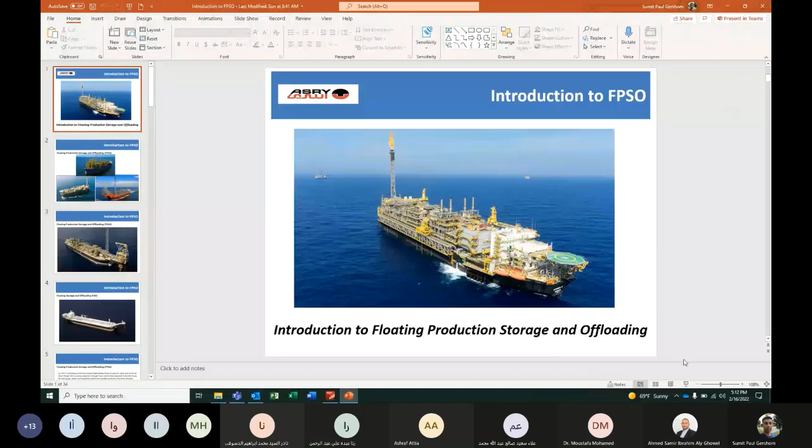Yes, it's visible. It's visible. Okay, fine.

So today's topic is one of the very interesting topics, which I cannot say is exactly related to marine. It is partly marine and partly offshore. I'm not sure how much you guys know about FPSO. It is one of a very unique kind of vessel.

So what is FPSO? FPSO is a floating production, storage, and offloading vessel. This is not a regular seagoing vessel. These FPSOs don't do charter or trips from port to port, or cargo loading and offloading. They are stationed in one location offshore for years, sometimes even for a straight 20 years. They don't go for docking every 2 or 5 years. They stay in one offshore field for 10, 15, or sometimes even 20 years.

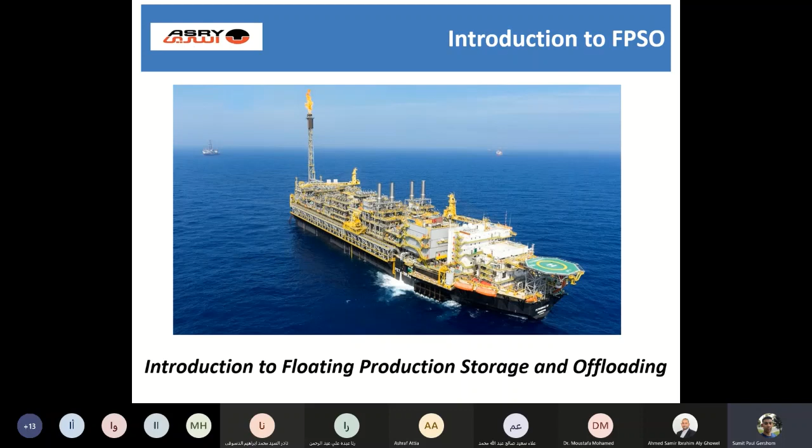We usually define FPSOs by the type of mooring system and the type of processing platforms on top. FPSO stands for floating, production, storage and offloading. Floating means it's already a vessel, we know it floats. The second item is production - on top you have a lot of production modules or different kinds of production packages. Then storage - the cargo tanks, which are below the hull, below the main deck. And offloading is when the treatment or basic processing is done, it is offloaded to another vessel, which transfers this processed or semi-processed crude to a refinery.

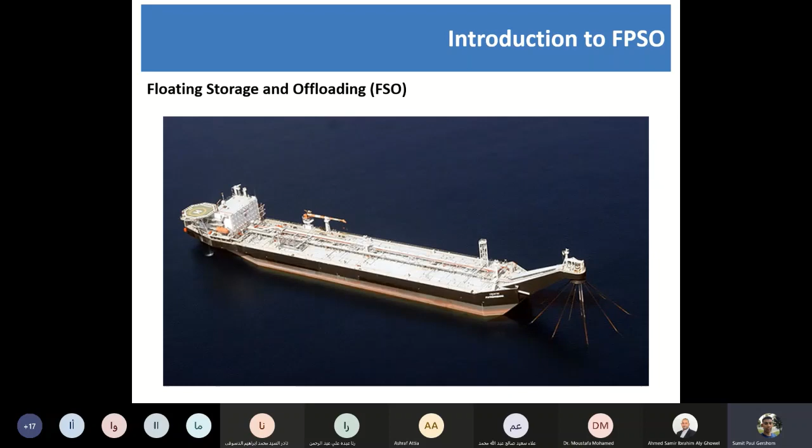So what is an FPSO? An FPSO is a floating production system that receives fluid - a mixture of crude oil, water, and other chemicals or gases, or produced water from the well, from a subsea reservoir through the risers, which then separates the fluid into crude oil, natural gas, water, and impurities within the topside production facilities on board. The modules on board the vessel do all this operation - they separate the crude, separate the natural gas, and remove water and other impurities. Then this crude is stored in the storage tanks of the FPSO and is offloaded to a shuttle tanker.

Most FPSOs and FSOs are ship-shaped and can be secured to a seabed via a variety of mooring systems, the choice of which is determined by the specific environment. As I was saying, these are two very important deciding factors for an FPSO: one is the mooring system and one is the process platforms - what kind of process platforms are present on the deck. Some of the FPSOs can stay in one location for 20 years or longer.

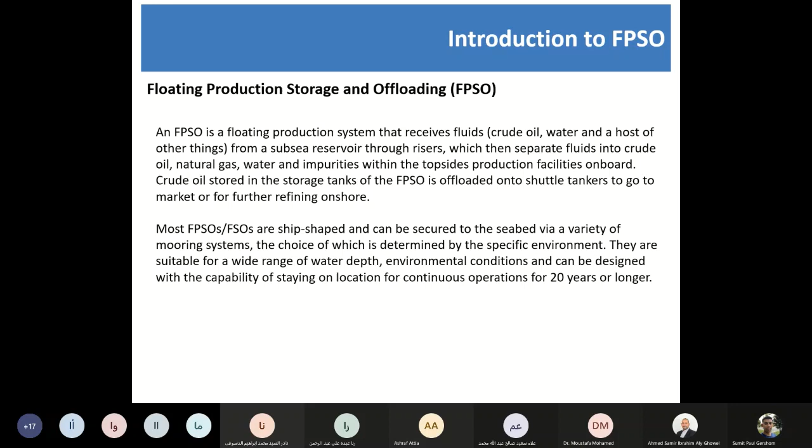Sumit, my screen is not moving. Is it only me or anybody else? For me, it's only for you. Same? It's clear okay for us. Okay Sumit, so sorry, proceed okay. Okay, my network, okay.

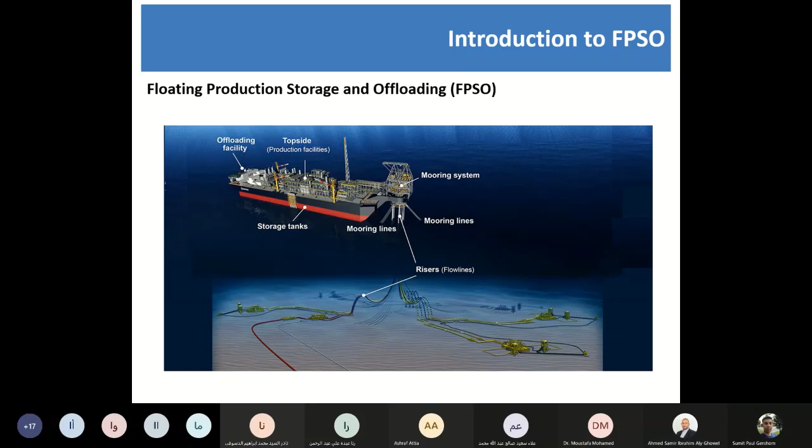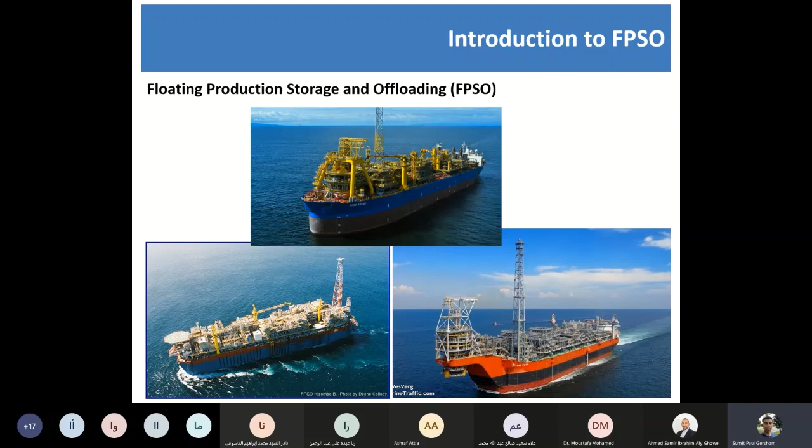So the three different kinds of FPSOs that we have, as I said, are internal turret, external turret, and spread mooring. This is what an internal turret looks like. When I say turret, this entire structure is called a turret - or even in this left bottom picture, this entire structure which looks opaque is a turret. So what is a turret? I believe you guys will know what a DP system is, dynamic positioning.

You must have heard DP0, DP1, DP2, DP3 - those kind of vessels. So this turret does exactly the same job as a DP, but in a much simpler way. Here in this kind of vessel, there is no DP at all. So how does a vessel stay in position? This acts as a very simple mechanical bearing, and this turret is moored to the seabed, and it allows the vessel to go around the turret.

There are some parts which I will show. There is a main bearing at the top, and a lower bearing at the bottom. And there are chains connected to the seabed, and then the risers - these are the risers coming from the seabed which bring in the oil.

So the internal turret is integrated into the bow end of the vessel and is supported on a large bearing arrangement inside the moon pool. As I was saying, there is a main bearing, and this cutout section is called a moon pool.

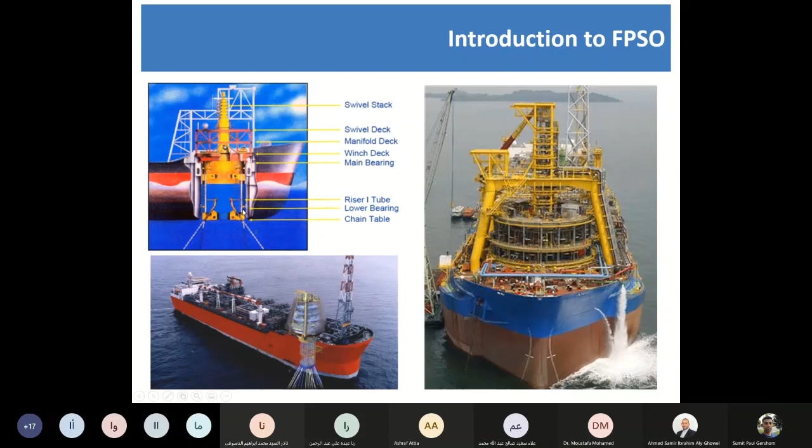The internal turrets are able to support a large number of risers from the seabed. These kind of turrets are only installed when there is comparatively a large number of risers coming from the seabed to the vessel. Also, the second important criteria is that internal turret can be used in deep waters and mostly for severe environments where you have waves up to 18 meters. So internal turret is mostly used where it is harsh environment and when the number of risers is much higher.

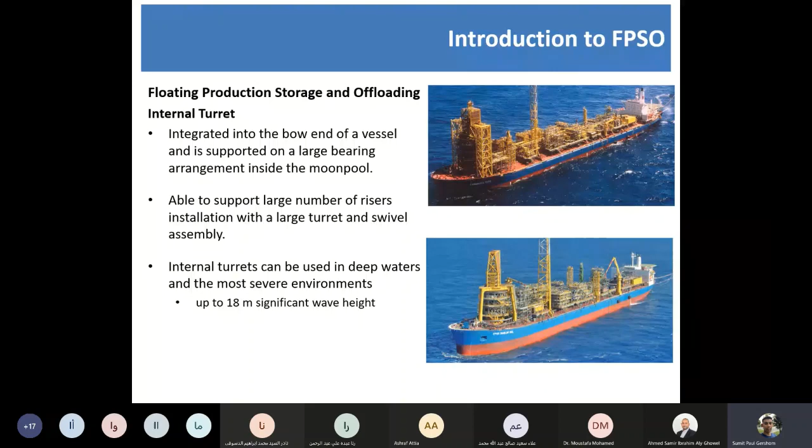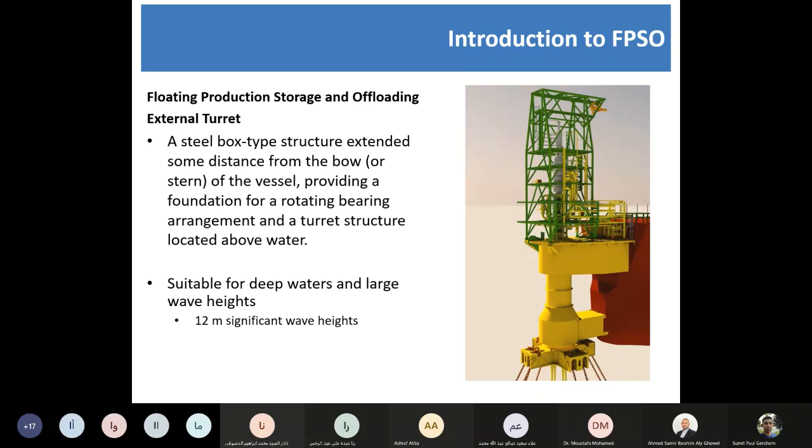So this is also the external turret mooring, you can see in the picture here. There are chains which are connected to the seabed - this is the mooring - and then there are the risers in orange. These are the production risers coming to the vessel.

So when I keep saying turret - what is a turret? A turret on a vessel is moored to the seabed and at the same time allows rotational movement of the vessel, which we call weather vaning, through the integrated rotating part in the hull. This allows the vessel to move around it no matter what - whether it is the wind, the waves, or the current. So the vessel stays in the same position, it just moves around this turret.

And this is a swivel stack. This is a very important part on the turret. This is an entire turret, and the top section of this turret is a swivel stack. What is the role of a swivel stack? This picture will show a display of a swivel stack.

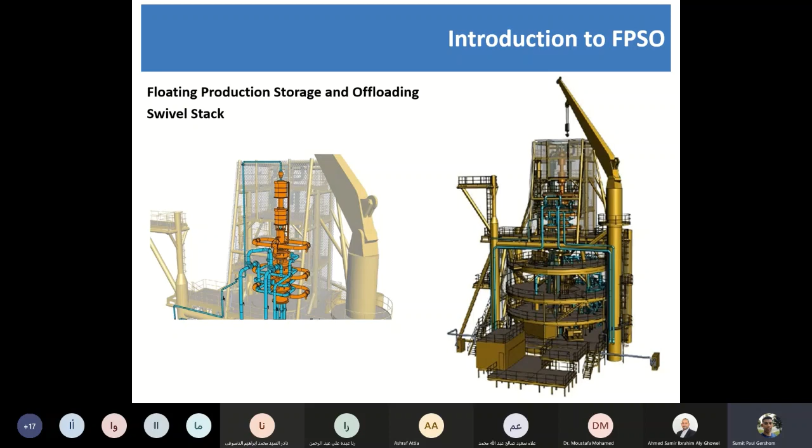So whatever oil or gas is coming from the risers, when the vessel is moving or rotating around the turret, this swivel stack makes sure that the risers don't get entangled or messy. The reason for that is it works very similar to hydraulics on a crane or a JCB, where a crane can do a slewing operation in 360 degrees without stopping, because the oil keeps on passing from the pipes to the necessary equipment or winches. It works with almost the same principle - it receives oil or gas from the subsea and passes it to the topside modules without interrupting. So the vessel doesn't have to come back to its location, and the risers don't get entangled.

Mr. Sumit, can I ask a question? Sure.

When we use the turret, is there any anchor at the end of the chain or what? Yes sir, there is an anchor, but that anchor system is also a very vast topic - there are a number of different types of anchors. Some are even pile type anchors, or some are suction anchors. This is not a regular drag anchor, mostly for internal turrets and external turrets. Clients or big companies like Shell, BP, or ExxonMobil working on these kinds of vessels mostly go for suction anchors. Suction anchor is a very simple concept - it's a big tubular which is erected on the subsea, and then the water is pumped out from the tubular, so it self-penetrates into the seabed.

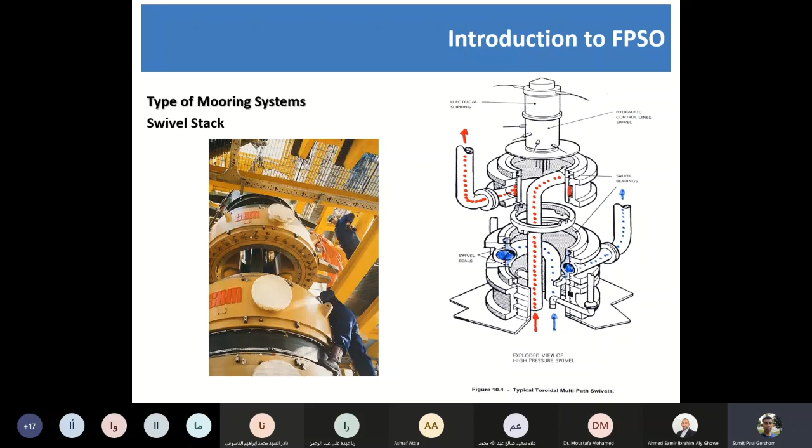So this is how a swivel stack looks like. A swivel stack is a toroidal swivel system installed on top of the turret that allows continuous transfer of fluids from the well to the platform, that is export, with uninterrupted power and control also. So everything goes through this to the subsea, or everything comes from the subsea through the swivel stack.

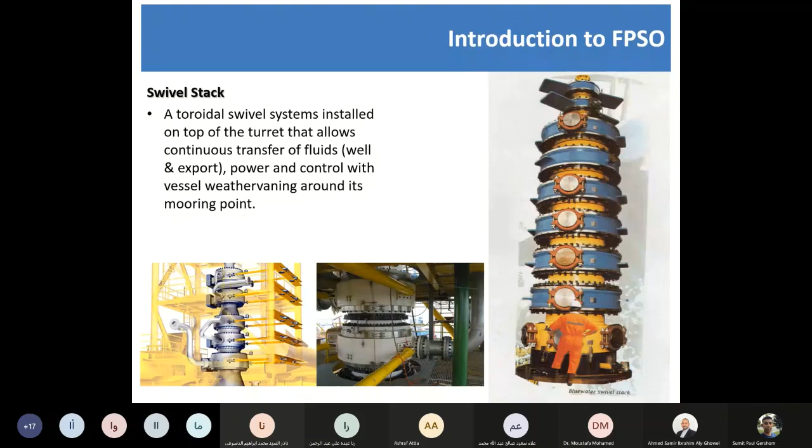Then there are some mooring systems or turrets which are detachable or disconnectable type. As I was saying, the internal and external turrets are for harsh and average weather conditions, but there are cases when the weather gets worse. Some of the FPSOs working in the North Sea or Gulf of Mexico plan for it so that during harsh climate conditions they should be able to move quickly. In those vessels we have to go for a disconnectable turret, so they will not have a conventional internal or external turret fully welded to the hull which cannot be removed in an emergency. These turrets are just removable or disconnectable type.

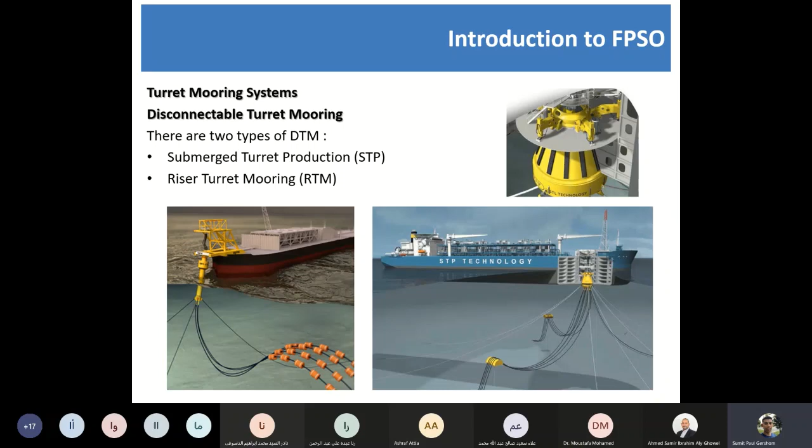There are two types of disconnectable turret mooring: submerged turret production and riser turret mooring. The one on the left is the riser turret mooring, the one on the right is the submerged turret production. This is how a submerged turret production looks like. You can see this turret is detached in the right hand picture, and it is just floating below the water, and it can be easily reconnected.

So submerged turret production consists of a buoyancy core and integrated turret, which provides the required buoyancy to the attached risers and mooring lines, so that when disconnected from the mating cone, it will float in an equilibrium position of 30 to 50 meters below surface. In this case it is still moored to the seabed, only the turret, and the risers are still connected, but it is disconnected from the vessel. So the vessel can move from the position and come back after the storm or weather condition is fine.

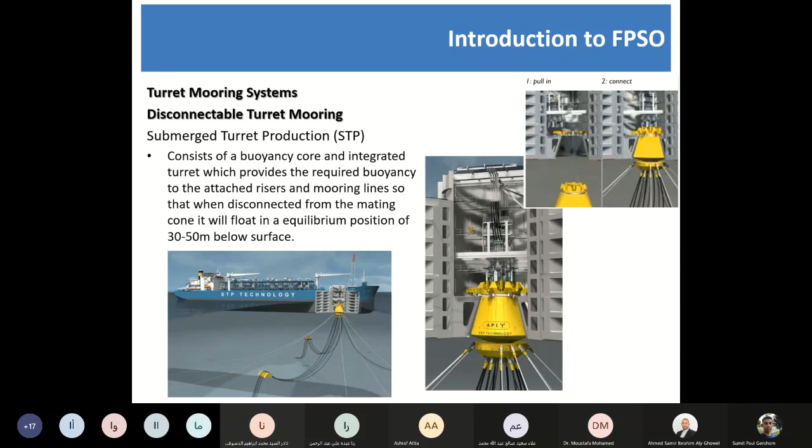This is the riser turret mooring. This is also similar - it can be disconnected and can be easily reconnected after the vessel is in place.

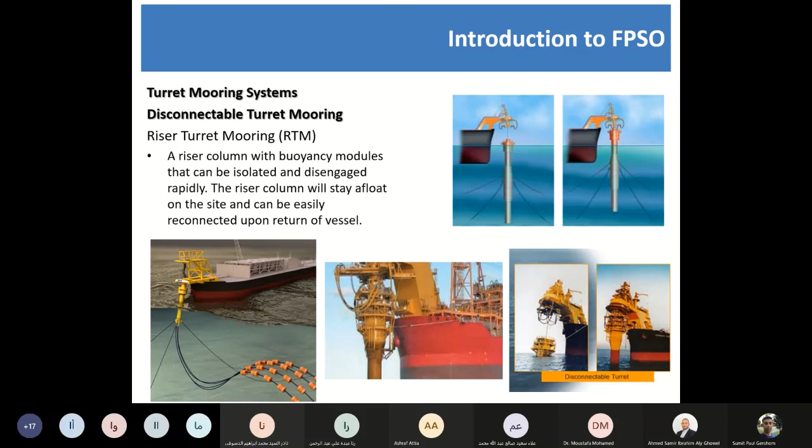And the next one is a spread mooring system. The spread mooring system does not require any kind of turret, and this is for ultra calm waters. This is mostly in Nigeria or South Africa, where we have calm waters, so most of the FPSOs are spread mooring in those locations where we don't need a turret.

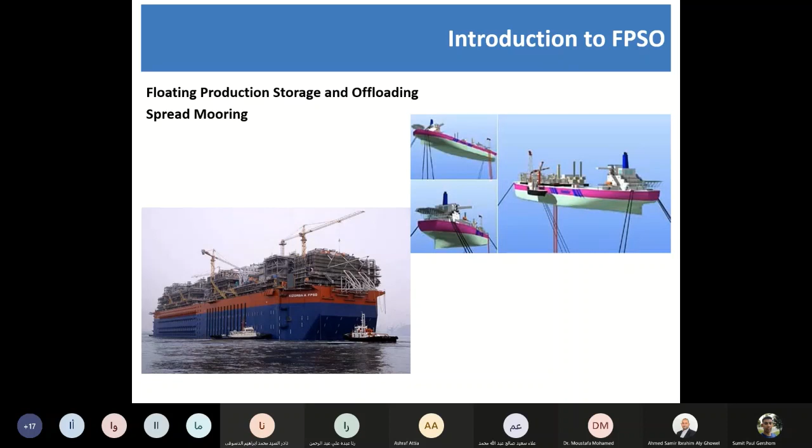So this is how a spread mooring FPSO looks like. There will be a riser balcony on both sides, so all the subsea pipelines or risers are connected on both sides of the vessel, port and starboard, in the midship area. If you see in the midship area, this is all the risers coming from the seabed - this is the production lines coming to the vessel. Then the mooring is standard mooring in the forward and aft area - you can see these are the mooring lines. So it is moored to the seabed, and this, as I said, can have a conventional drag anchor.

Mr. Sumit, one question please - these connection lines, are they connected by divers, correct? It is not connected by divers - 99% it will be connected by ROVs. Okay, ROVs, okay, so these are commercial? Yes, not divers. It is usually not divers, because even at this depth sometimes diving is not possible. The deepest spread mooring system is 1,600 meters, so I don't think 1,600 meters is possible for any commercial diver.

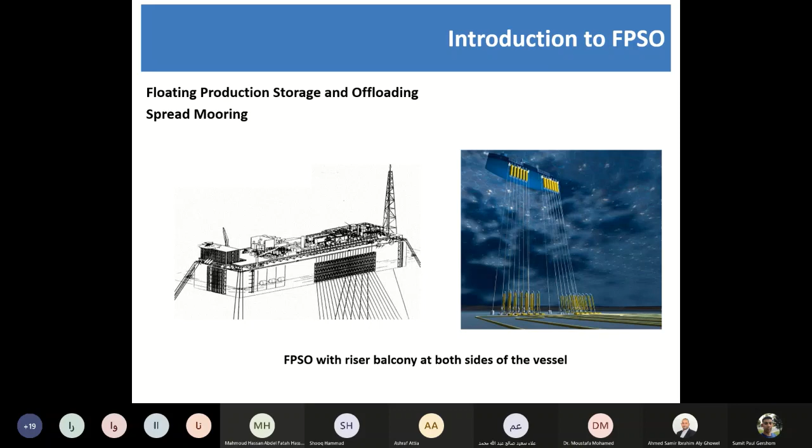So this is how a spread mooring system looks like, or a spread mooring FPSO. You see on this bottom left picture, the entire area from midship to aft is all the riser balcony, where these numbers of subsea pipelines will be coming to the vessel.

Okay, so well fluid separation - as I said, the production risers are coming from the seabed, bringing the oil to the turret. And then we have the turret, the riser balcony, where the oil comes in. This is the turret and the riser balconies are here, and then we have the separation modules where the processing takes place.

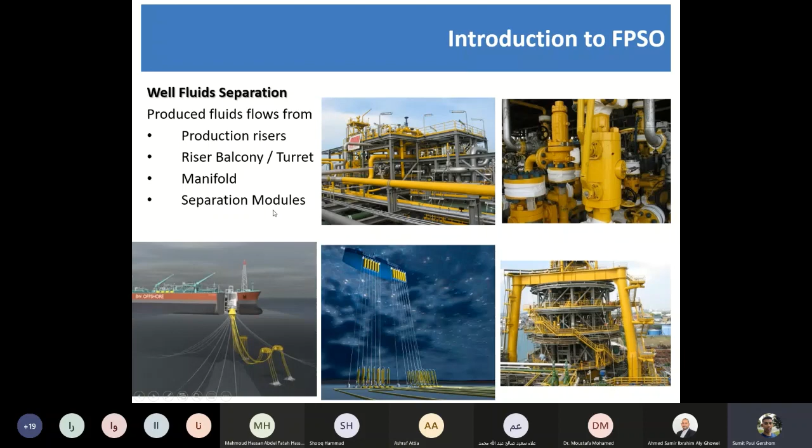So this is how a regular FPSO looks like, or how we classify it. On the FPSO deck, you will have a number of production modules. This production module can be very different from vessel to vessel because it is decided by the field - what kind of treatment or processing is required for that particular field. So this is purely based on the study of each oil field, and it can differ from FPSO to FPSO. But there are some very basic modules or process platforms which are always there in all FPSOs.

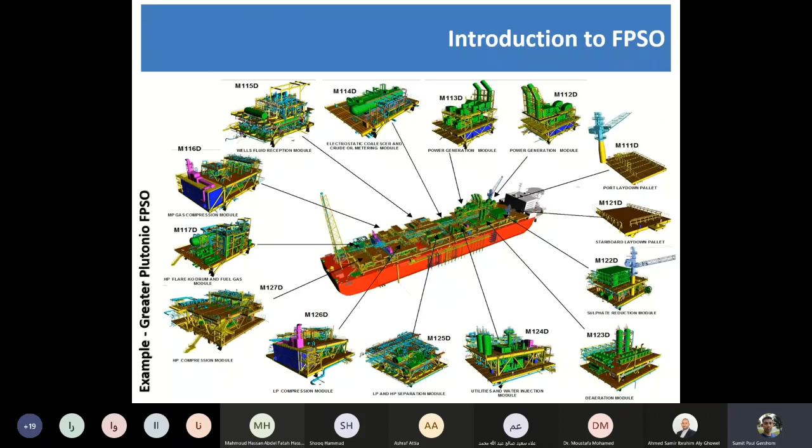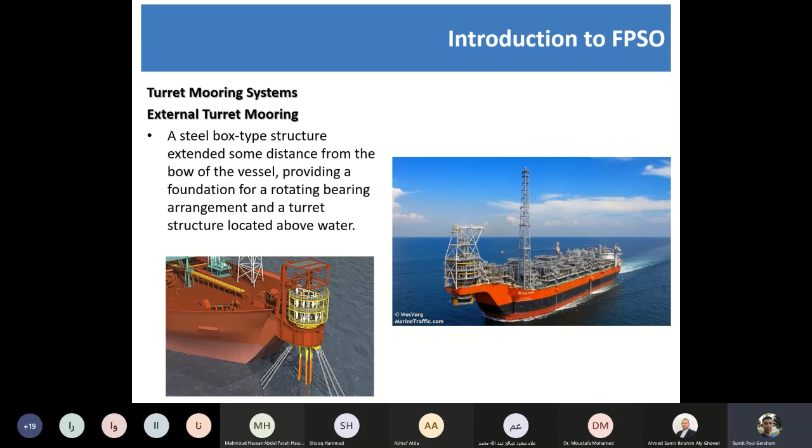If you see on this, this is the flare boom. It is used for flaring the gas that cannot be converted or used, so it is flared to air and burnt off. This is mostly at an angle. On this vessel it is straight, but on most vessels the flare boom is at an angle. It is very difficult to install this.

I will show some examples of one of the biggest FPSOs or FLNGs that we have. I believe some of you might know this vessel, FLNG Shell Prelude. This is stationed in Australia. At the moment this vessel is shut down due to a fire on board last December, and it is still shut down. This is one of the biggest FPSO or FLNG available now.

The displacement is 600,000 tons. The length of the vessel is 488 meters, beam is 74 meters, and the height of the vessel, including the flare boom, is 105 meters tall. The production capacity is 110,000 barrels equivalent of oil per day, and the storage is 437,500 cubic meters.

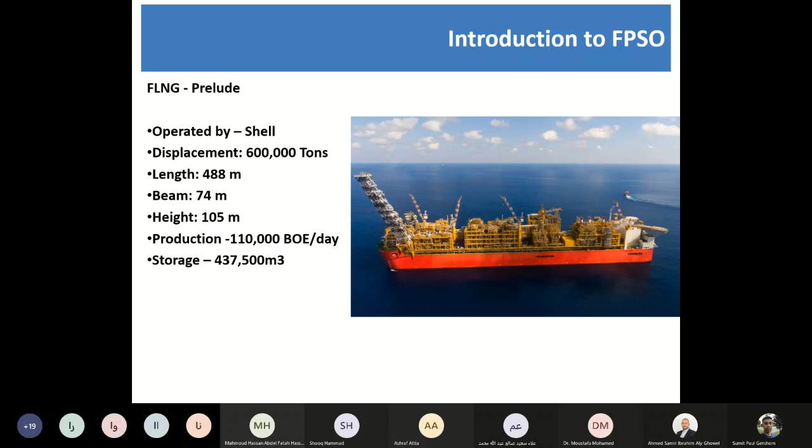This is some photos of the same vessel. You can see the flare boom, this is at an angle. And this consists of an internal turret. You can see in the bow area, this is the internal turret, and this turret is the biggest turret in the world so far. It weighs around 8,000 tons.

Same, it's Shell Prelude, a few pictures. And for spread mooring, this is the biggest FPSO with a spread mooring available today. The vessel is Egina, operated by Total. The length is 330 meters, beam 61 meters. The displacement is 499,900 tons. The production capacity is 200,000 barrels per day, and the storage is 2.3 million barrels.

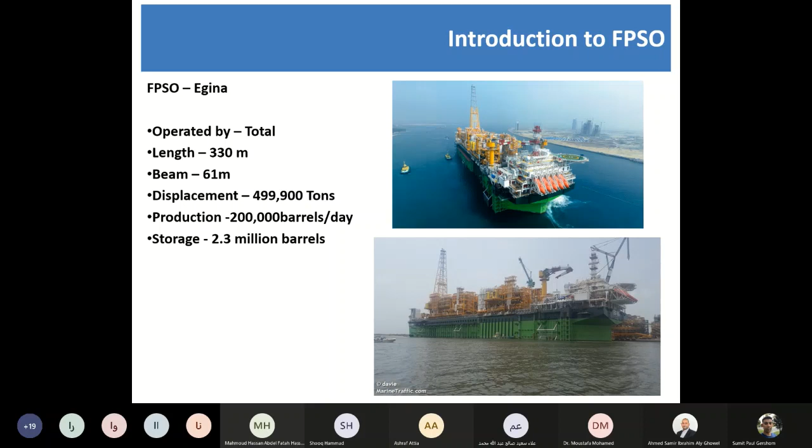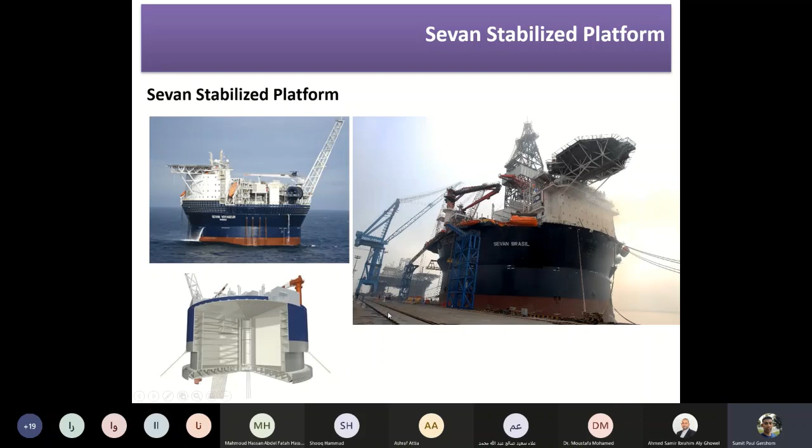Next topic, what I want to share with you is very interesting for students, especially when I was one. This is a very interesting concept, SSPs, Sevan Stabilized Platforms. There are very few in the world which are built, and it is extremely expensive to build these. There are very few in the world, and they have different kinds of vessels. Some are FPSOs, you will see this is an FPSO. Why I'm saying there are very few and it is very difficult to manage these kinds of vessels is because of the diameter. This is a very unconventional shape, exactly round or cylindrical.

It is exactly round or cylindrical, so there are only a few docks in the world which can accommodate these kinds of vessels. The diameter of this vessel is around 80 to 120 meters. There are a few different sizes, starting from 80-meter diameter to 120 meter, so there are very few dry docks that can accommodate them.

And the purpose of this vessel or design is the most interesting concept, because this doesn't need a turret. It is also working on the spread mooring system, but much less mooring is required because of its shape. It is exactly cylindrical, so it doesn't have much effect of waves, winds, or tides.

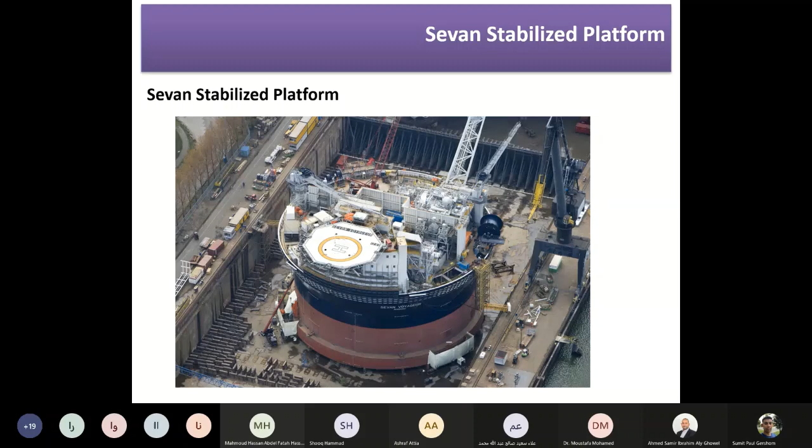So there are few SSPs available, few FPSOs available, few MODU mobile offshore drilling units. There is one FLNG, and if I'm not wrong, there is one FDPSO only. I don't think there is any GTW or FAU or MSVs built so far. So this is more of a concept design, and there are very few of these in the world.

So mostly that's all from my side. Any doubts or any questions?

Thank you very much for the amazing lecture. Welcome. Yeah, I have one question. Yes, go ahead. Thank you.

The SSP, is the main platform self-propelled or not? Pardon me, say it again. Is it self-propelled or not? I didn't get your question. I'm sorry, is it self-propelled or not? No, it is not self-propelled. I believe this shape is very difficult to have its own propulsion.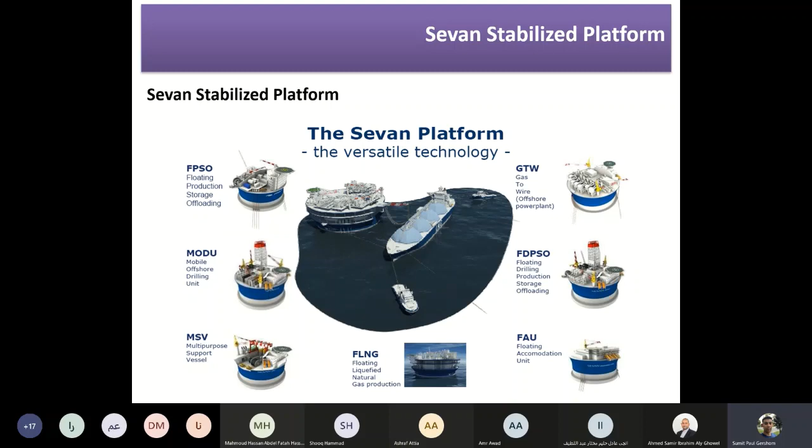Okay, the main function of flare boom.

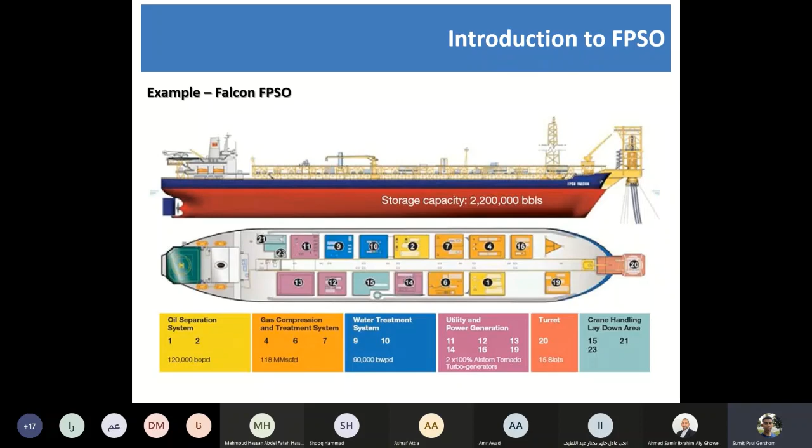When I was saying there is a gas compression or gas treatment system on board the vessel, there will be some gas like methane, or a few other gases which you cannot convert to something else, and you have to flare it or waste it. So there are some ways of using those gases. Some vessels can burn it off and produce energy, but some vessels cannot, so in these kinds of vessels you cannot use it anywhere else, so you have to flare it.

So on these vessels you have something called a flare knockout drum. This is the last stage which starts the processing of final separation of this waste gas, and then it is flared through the flare boom. So this gas is the only gas which cannot be used for anything else, or which cannot be stored for any useful purpose.

Okay, thank you. Sorry, is the position of the turret always at the forward of the ship?

Most of the designs, yes, it is only in the forward of the ship, either internal or external, because that is the most suitable place for a vessel in case it wants to weather vane, if it wants to rotate along its axis.

If one of you is a designer, you can try it on some design software, and I believe this is the most suitable position. Instead of having it at midship, where you'll have equal stresses or equal pressure or force from both forward and aft, it's more sensible to have it on one corner and let the whole vessel move around it.